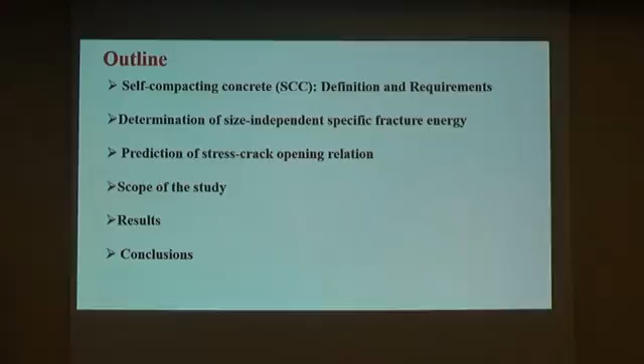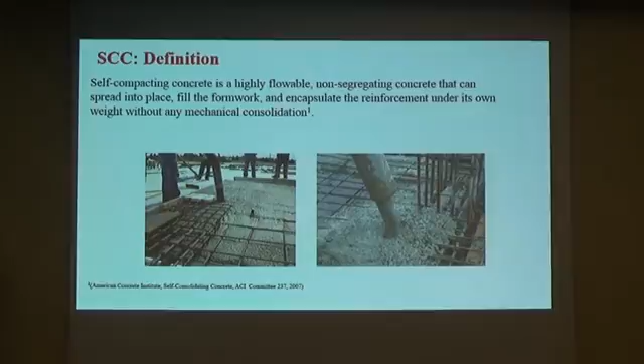Self-compacting concrete is a highly flowable, non-segregating concrete that can fill the formwork and consolidate under its own weight without any mechanical consolidation. This type of concrete can be used in reinforced concrete structures, especially where there is congested reinforcement, and especially with complicated structural design.

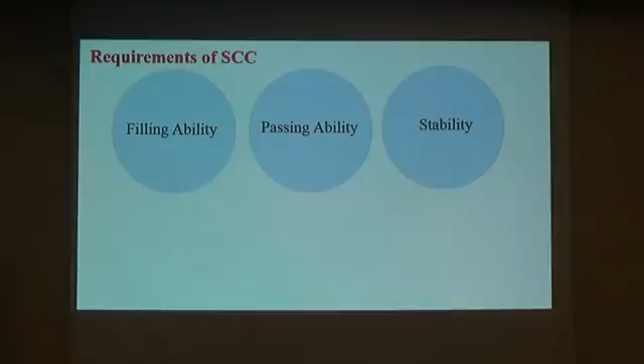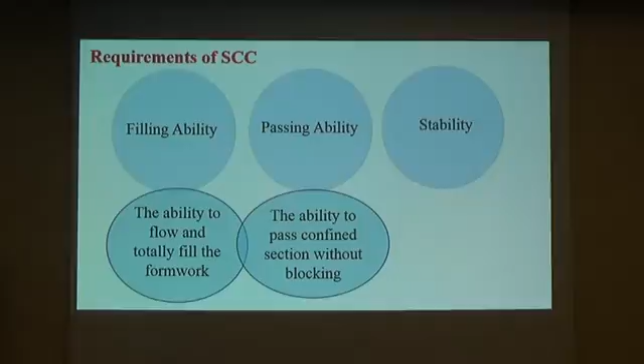Requirements of self-compacting concrete: there are three requirements. The first one is filling ability, passing ability, and stability. Filling ability is the ability to flow and totally fill the formwork. Passing ability is the ability to pass in a confined section without blocking. Stability is the ability to stay homogeneous during and after the casting process.

As I mentioned before, I will talk about the main properties of fracture energy. The first one is the size-independent fracture energy. According to RILEM recommendations, the specific fracture energy can be obtained by the work of fracture required, based on notched three-point bend testing, and by using this equation, the obtained specific fracture energy is dependent on specimen size.

After that, Hu and Wittmann proposed a methodology called the boundary effect hypothesis to obtain size-independent fracture energy, depending on different sizes of specimens and different notches.

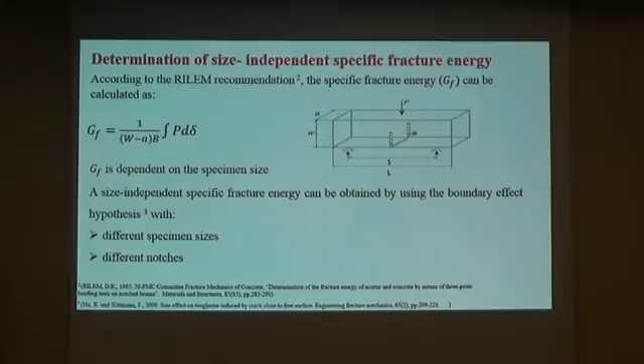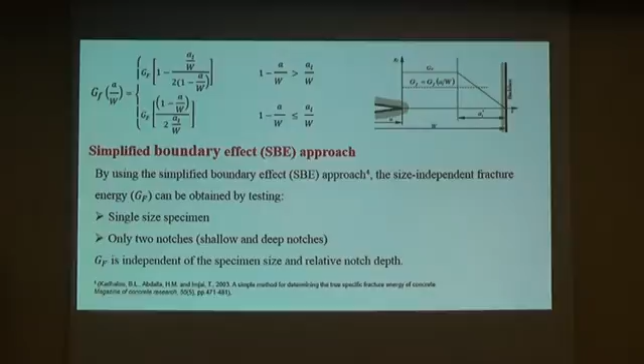After that, Karihaloo et al. simplified this method, allowing the size-independent fracture energy to be obtained by testing just a single size specimen with only two notches: shallow and deep notches.

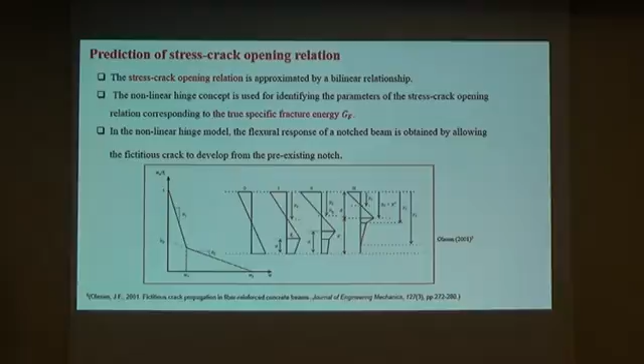Besides size-independent fracture energy, there is another property, which is the stress crack opening relationship. By using a non-linear hinge model and an inverse procedure, this relationship can be obtained, and more information about this procedure can be found in this reference.

Scope of this study: there are three self-compacting concrete grades, 30, 60, and 80 megapascal, and these mixes differ by coarse aggregate volume fraction. There are three volume fractions of coarse aggregate, three paste-to-solid ratios, and definitely three grades of strength: 30, 60, 80. Also there are three water-to-binder ratios.

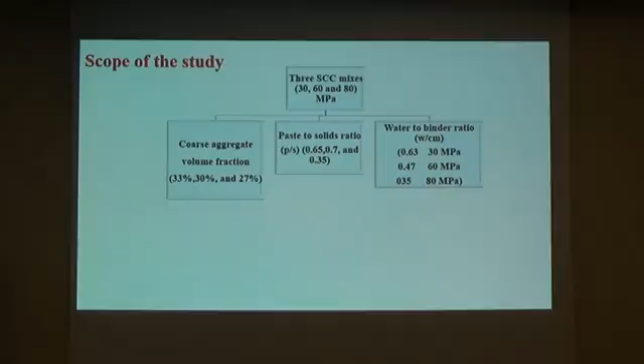Depending on the grade of strength, the fracture behavior parameters—as mentioned before, size-independent fracture energy using the three-point bend test, and the stress crack opening relationship using the nonlinear hinge model—are obtained.

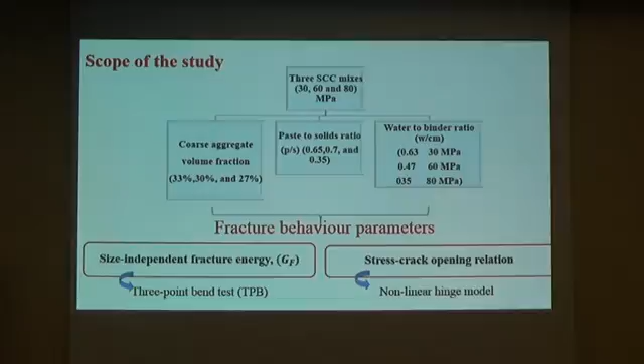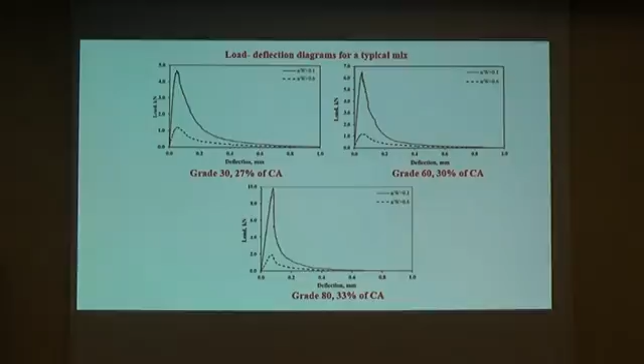Results: firstly, the load deflection diagrams for different SCC mixes for both shallow and deep notches are shown in this figure. The top figures show the effect of volume fraction on GF. It is seen that GF increases as the volume fraction of coarse aggregate increases, and this increase is less pronounced with the SCC 80 megapascal mix compared with the 30 and 60 megapascal mixes.

Regarding the effect of water to cementitious material on GF, it can be seen, as expected, that GF decreases as the water-to-binder ratio increases. Regarding the third parameter, the effect of paste-to-solid ratio on GF, it can be seen that there is a slight increase in compressive strength when paste-to-solid increases, but a noticeable decrease in GF when paste-to-solid is increased.

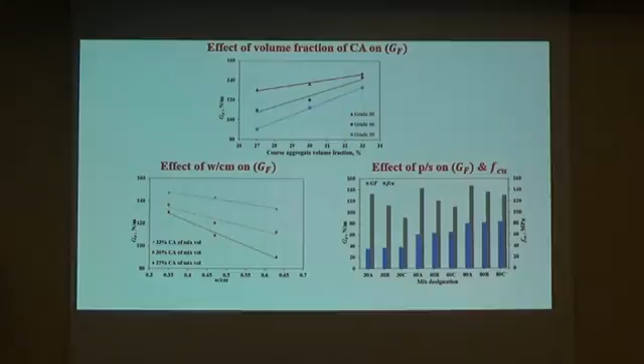Then, as mentioned before, when using the non-linear hinge model, the expressions of CMOD and central load are used to minimize the difference between experimental load-CMOD and theoretical predicted values. The results of this minimization are shown in these figures.

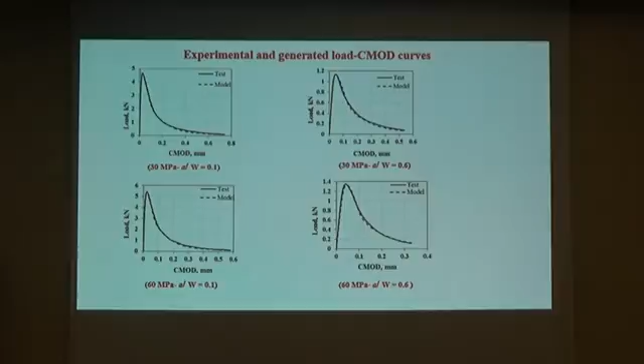After that, by using this minimization, the parameters of the stress crack opening relationship can be obtained for grades 30, 60, and 80. It can be seen from these figures that the crack opening increases with the increasing volume fraction of coarse aggregate.

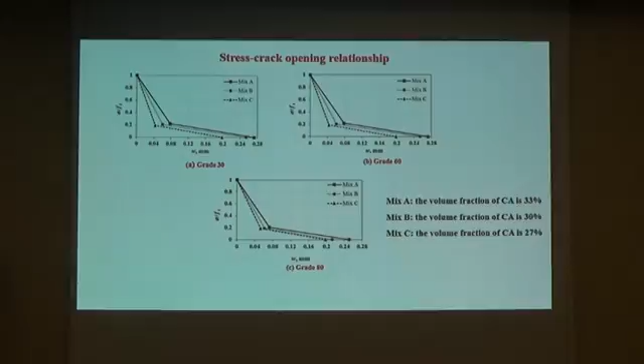As for the direct tensile strength of concrete, it is known that direct tensile strength is 2/3 of indirect tensile strength. Direct tensile strength here can be found using an inverse procedure, and indirect tensile strength can be found by testing the splitting tensile strength of concrete. From these figures, the ratio of direct to indirect strength is shown to be dominated by the coarse aggregate volume fraction, and the final parameter, the characteristic length, which gives an indication of the ductility of the self-compacting concrete mix, is also dominated by the volume fraction of coarse aggregate.

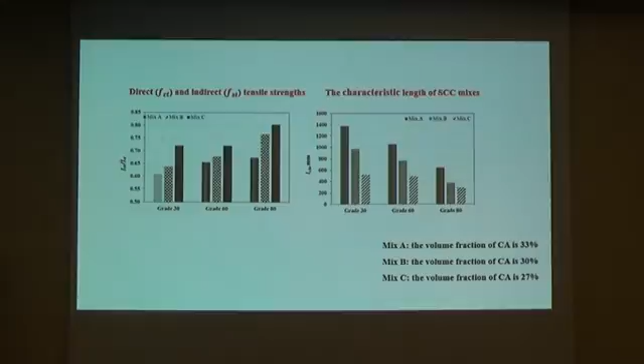So maybe there is no time to read the... 11 minutes and so. Okay. This is the main conclusion. Can I read it or continue?

Specific fracture energy increases with the coarse aggregate volume fraction, and GF decreases with the increase of water to cementitious material ratio and paste-to-solid ratio—with increased paste-to-solid ratio, GF decreases. Critical crack opening is also dominated by the coarse aggregate volume fraction, and the same applies to the characteristic length. Thank you very much.